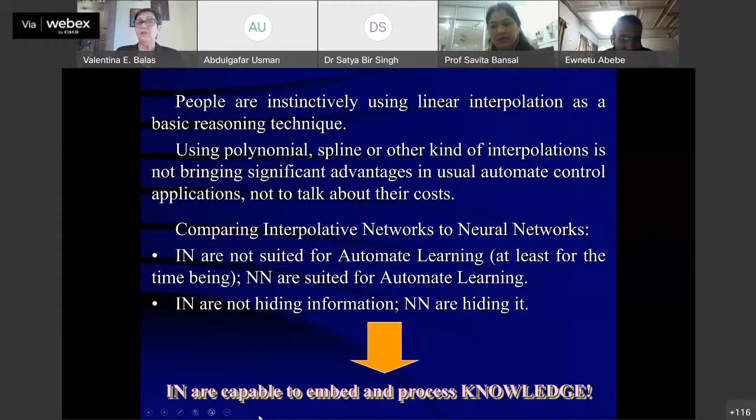It is well known that people instinctively use linear interpolation as a basic reasoning technique. And comparing interpolative networks to neural networks, we can see that interpolative networks are not suited for automatic learning, neural networks are suited for automatic learning, and interpolative networks are capable of embedding and processing knowledge. This is very important for us. And the starting point for the fuzzy interpolative systems used in our control work was interpolative networks from Sir Isaac Newton as universal approximators, but the roots are also in fuzzy logic developed by Professor Zadeh.

It's about knowledge linguistic representation. Our approach, fuzzy interpolative methodology, shows us a fuzzy interpolative controller, that is a controller that can be equated with an interpolative network that I have introduced before. So there are fuzzy control rules that have each one a corresponding interpolation node, and very easy, the immediate result is that it can be implemented by lookup tables or other similar tools, even in analog integrated circuits.

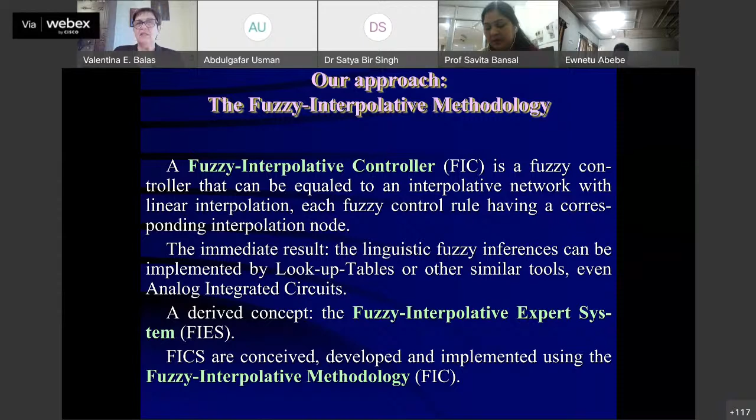A derived concept is the fuzzy interpolative expert system. And in few words, I will develop this fuzzy interpolative methodology. We used 3 different sources in developing this methodology. First, it was the papers of Zadeh, Sugeno, Bauer, and you can see here the Sugeno fuzzy controllers. They can approximate finite n-dimensional functions with arbitrary precision. You can see the red line is an approximation for the black line.

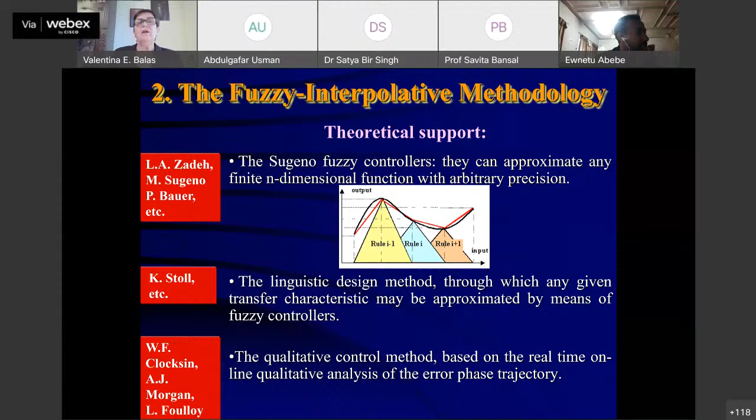Then papers of Stoll with linguistic design methods, and last, Clocksin, Morgan, and Laurent Foulloy. It's about qualitative control based on the real-time online qualitative analysis of the error phase trajectory. With Professor Laurent Foulloy, I spent 2 months in France during my PhD documentation, with their team in Annecy. They are working with such qualitative control methods.

Also, the main model is very easy to understand, starting from a controller with an immediate linear interpolative equivalent. We are using fuzzy triangular partitions, prod-sum inference, and center of gravity defuzzification.

Here is Professor Sugeno, who visited my country every 2 years for the conferences that I'm organizing here, Soft Computing and Applications, and he is the honorary chair of my conferences. At the same time, Professor Zadeh visited Romania 5 times at my invitation, again for my conferences or on other occasions.

In closed-loop control applications, fuzzy interpolative controllers match this fundamental time analysis tool, the phase trajectory of the error, that is associated with qualitative analysis. Here it's very easy to understand the methodology. First, we are using the phase trajectory of the error. You can see the error and the derivative of the error, and this trajectory that is going to 0. This is our dream, for people working in automation: the error to be 0.

Then we are speaking about McVicar-Whelan tables and the interpolative networks implemented by lookup tables. Very easy. Anyway, to understand very well all that is here, this methodology, classical automatics must be well known. And after that, the information is so much concentrated here, so it's not so easy to understand at first sight.

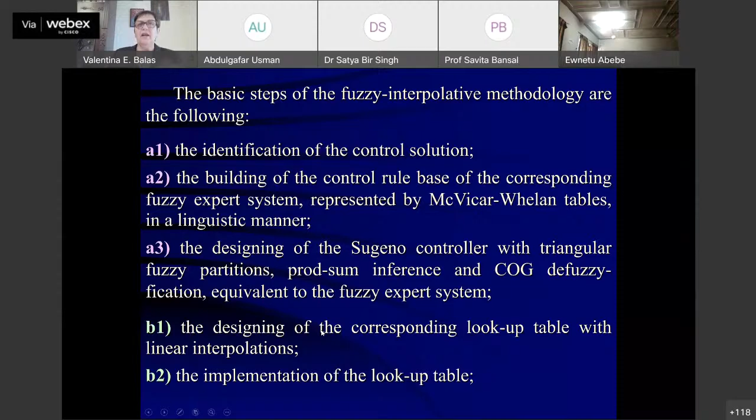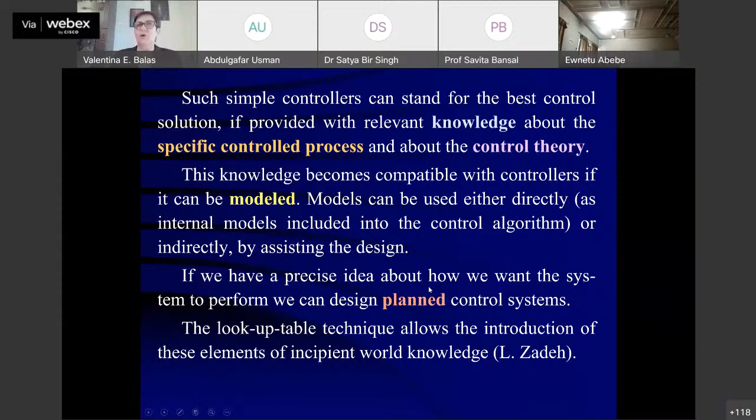And also, such controllers stand for the best control solution only if we provide them with relevant knowledge about the specific control process. This kind of knowledge Professor Zadeh named world knowledge. And we can introduce it in these lookup tables.

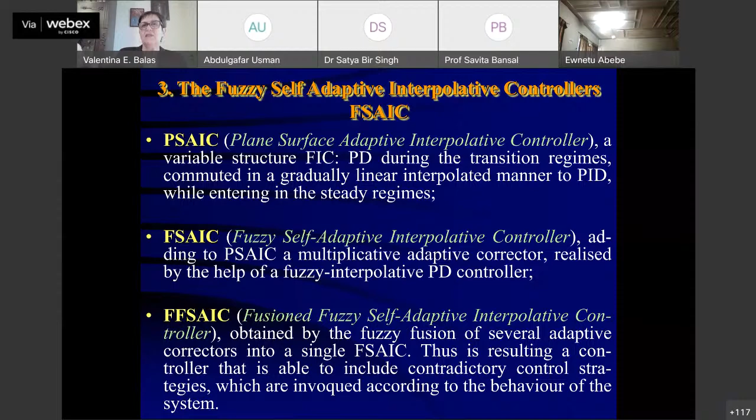During the World Conference on Soft Computing in 2018, we discussed a lot with Professor Jerry Mendel. You know that he introduced fuzzy type 2 systems and so on. And it was a very nice discussion with him.

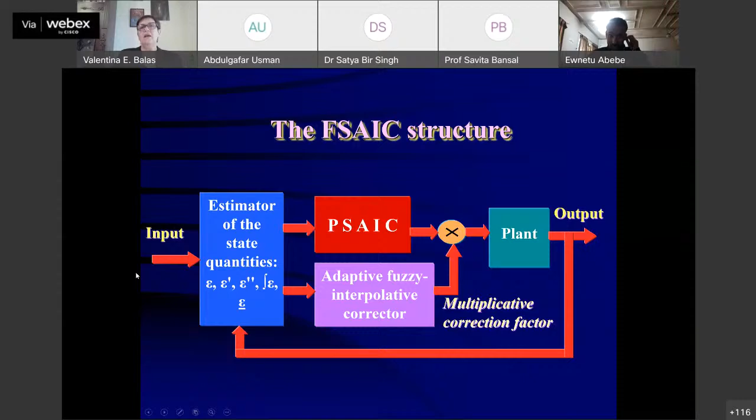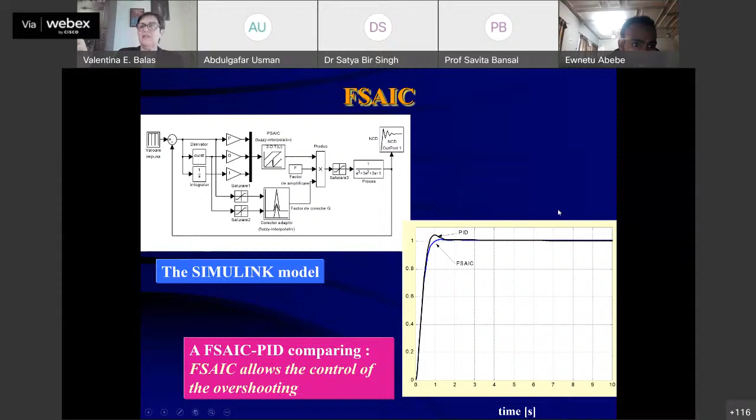Then the next member of the family is organized around the first one, putting in these blocks. And here is a simulation just to show that this controller works better than a PID. You can see the step response here, the blue line that goes very fast to the value that we introduced, 1. So there is also some development of the control rule base to organize the corrector and so on.

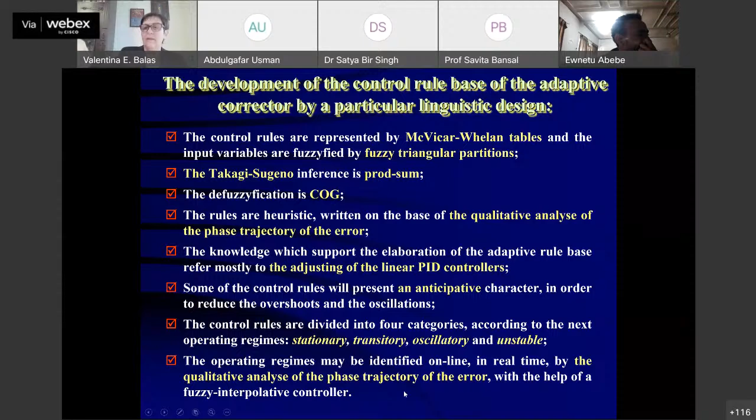You can see many things here, but very important are these different categories, 4 categories or operating regimes: stationary, transitory, oscillatory, and unstable. And we are working, as I told you, using the qualitative analysis of the phase trajectory of the error. These are the 4 regimes, and what is happening with the gain in each regime: G1 transitory, G2 steady, G3 oscillating, and G4 unstable.

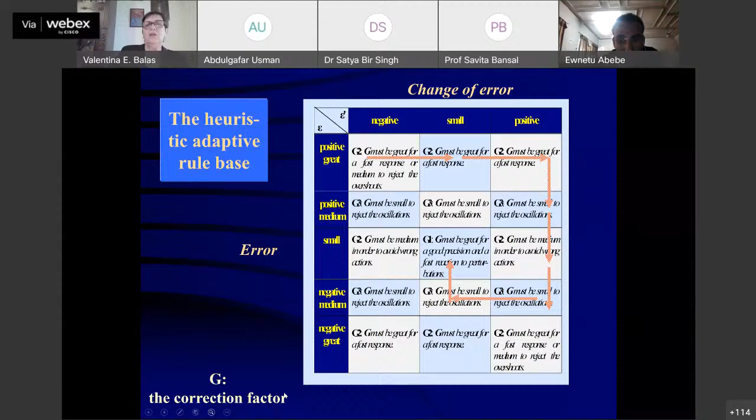You can see this operating regime in this figure, G2, G3 oscillating, G4 unstable, looking in the phase plane of the error and the derivative of the error. Here is the heuristic adaptive rule base, organized again in this table, the error and the change of the error. And we are looking at the correction factor.

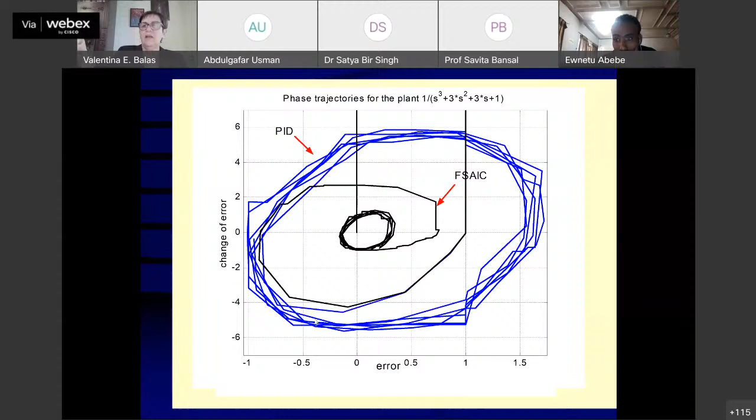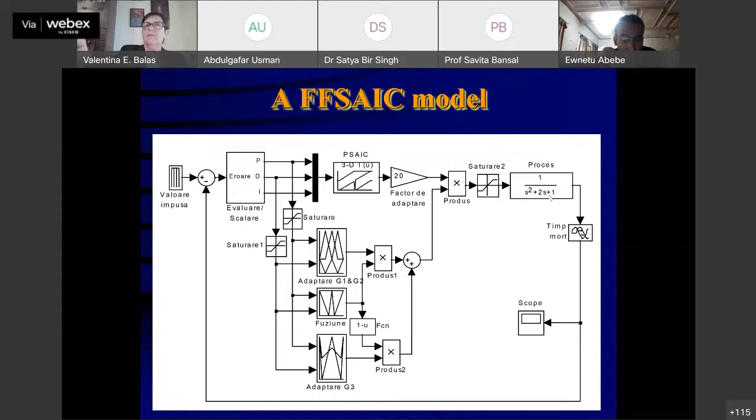So there are some benchmark studies that confirm this remarkable potential of fuzzy self-adaptive interpolative controllers. And it's important that we are using them first of all in applications, because me and my husband, the principal person in this team, together with our colleagues and PhD students, were working for 9 years in an institute for research in railway coaches. It's the biggest factory for railway coaches in Southeast, in our city.

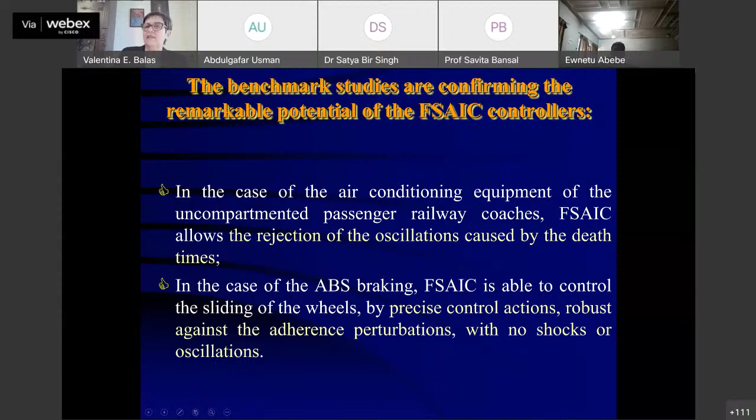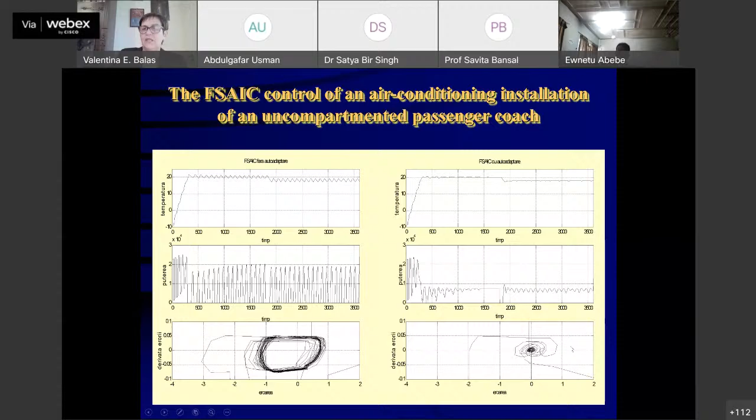And the first applications were this air conditioning equipment using this controller and an ABS braking. So we observed that they were working very, very well for this kind of highly nonlinear systems. This is about the air conditioning installation for an uncompartmented passenger coach using this fuzzy self-adaptive interpolative controller without adaptation, and with adaptation you can see the oscillation is very, very small. It's an ABS controller. I will come back to this.

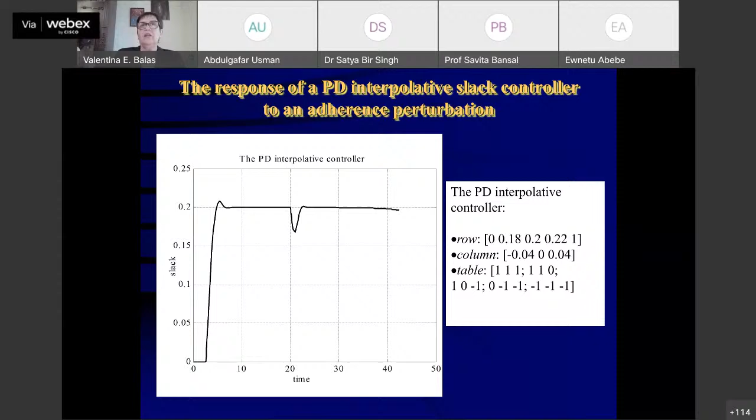And again, some simulations by introduction of adherence perturbation, different oscillations, and some advantages of such controllers. It's very easy and fast to develop them. And as I told, after developing them as lookup tables, implementation is very easy using FPGA. They have good performance and cope with unknown processes, and also they are efficient to implement in any software and hardware technologies.

Here also I want to arrive to that side where I am discussing optimization. So another interesting chapter that we studied in our last years is related to what is happening when we switch from a controller to another one. More precisely, what is happening when we switch from manual to automatic pilot, let's say. So we know that we are dealing with digital systems, and the fundamental advantages of such digital systems are very well known, and still they have limitations. Why are there limitations? Because of an oscillatory behavior caused by the discrete action of an ABS controller.

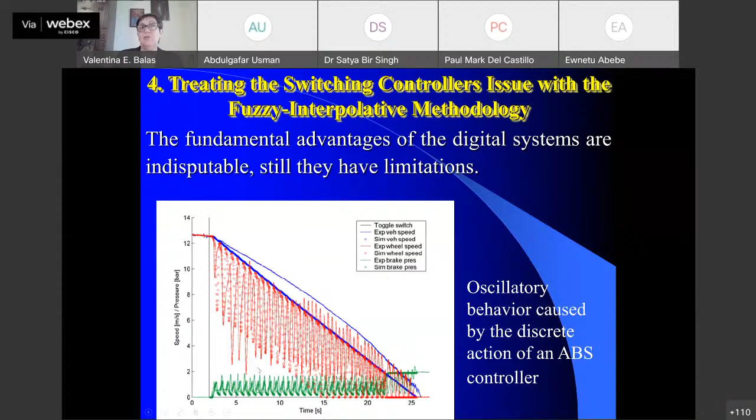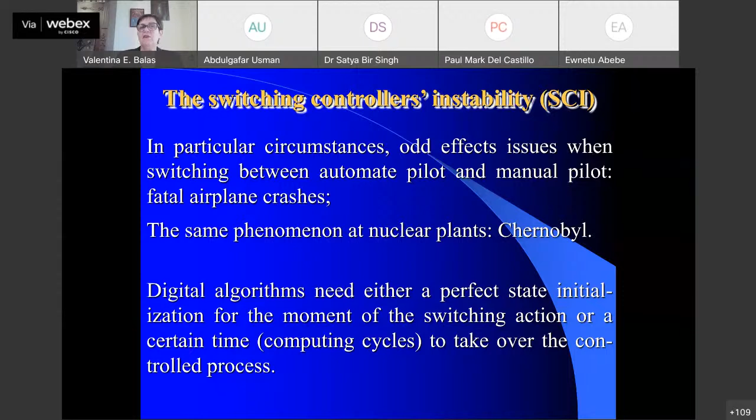Switching controllers instability is an important chapter here to discuss. We need only to think of the phenomenon in nuclear plants, Chernobyl. There this phenomenon was happening. They tried to switch from automatic to manual mode, and this big error happened there and a big accident. The same things are happening also for airplanes when they want to switch from automatic pilot to manual pilot. Why? Because algorithms need either a perfect state initialization of the switching action or a certain number of computing cycles to take over the control process. So there are some processes that are happening there.

Some detailed studies of switching phenomena were reported, but mostly for linear systems. Switching systems can be potentially destabilized by an unlucky choice of the switching moment. For Hurwitz stable closed-loop systems, this stands even for identical switched systems. Even if they are identical, you will see in some simulations what is happening there. The concrete implementation of the computer that performs the process control can produce the same effect: integration method and tuning, sampling rate, and so on.

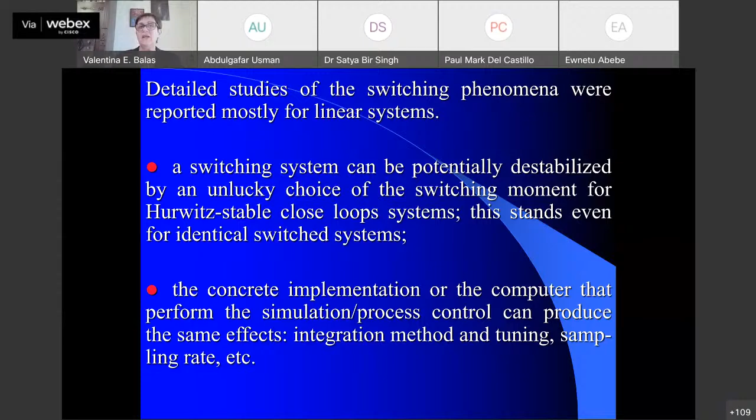So the frequency analysis cannot be used because transfer functions are defined for null initial conditions. So for nonlinear systems, the frequency analysis has few chances to produce results because of the lack of a unified theory. A better solution is the time analysis. So we can use again this phase trajectory that can fully support the design of switching controllers for linear systems. And we aim to move these techniques toward nonlinear systems, replacing the precise control of the phase trajectory that can be achieved in linear systems by qualitative analysis of the phase trajectory, as I told you, related to the work of Professor Laurent Foulloy. The method can be easily implemented again by fuzzy interpolative controllers.

A benchmark study: we have a PI and a PD controller, and we want to switch controllers for a DC drive. There are some real data here, and we have them for the PI controller and for the PD controller.

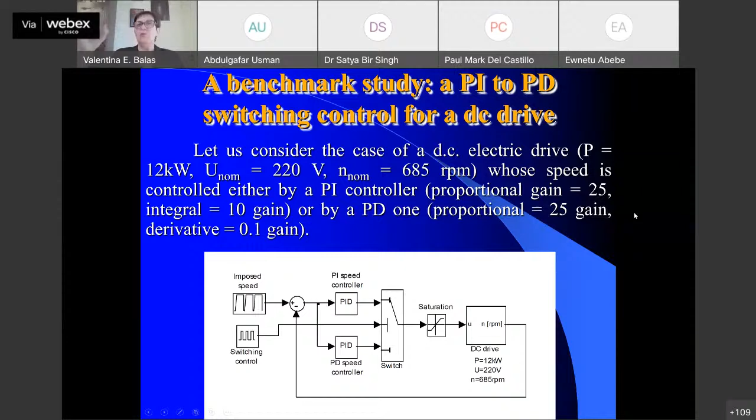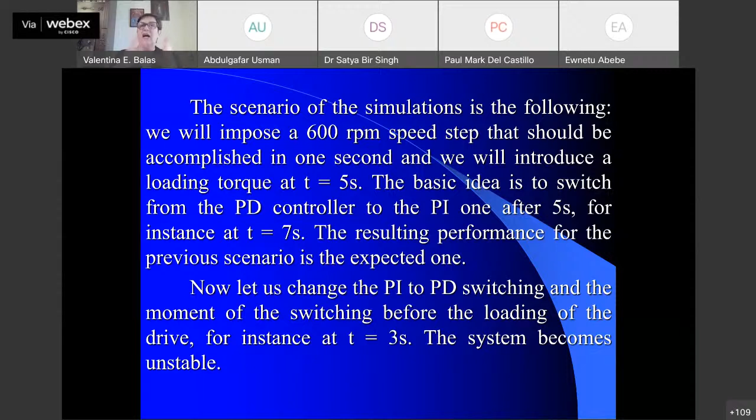In this figure, you can see it's written PID for both, but one is PI, one is PD, and we want to switch from one to the other. We have saturation and here the DC drive, and we will take a look at what is happening when we do this switching action.

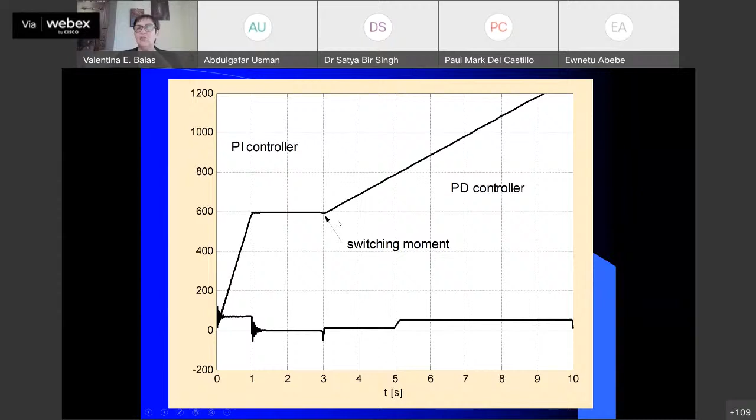We introduce different times for when the switching moment will arrive to see what happens. From some real data, we show what happens with the PI controller, which is keeping 600 rotations per minute. At the switching moment, switching from PI to PD, we can see the value going up instead of maintaining it.

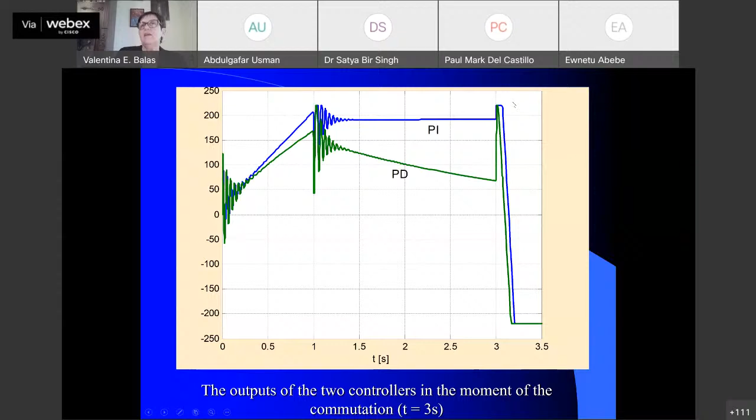So it's an instability just when you switch from one controller to another. This slope can be negative or positive, going up or going down. If we try to switch at 5 seconds, the slope is going down. At 4 seconds, the slope is going up. When we switch from one to the other, the output of the two controllers at the moment of commutation, at 3 seconds, we can see what is happening.

So there are some empirical observations: controller instability may evolve in both senses, positive and negative. It can appear as well in the case of same-type controllers - we can have PD and the same thing happens. It finally produces saturation of the controller, but its causes are not necessarily linked to saturation. It essentially depends on the simulation's parameters, integration method, error, and even the simulation hardware.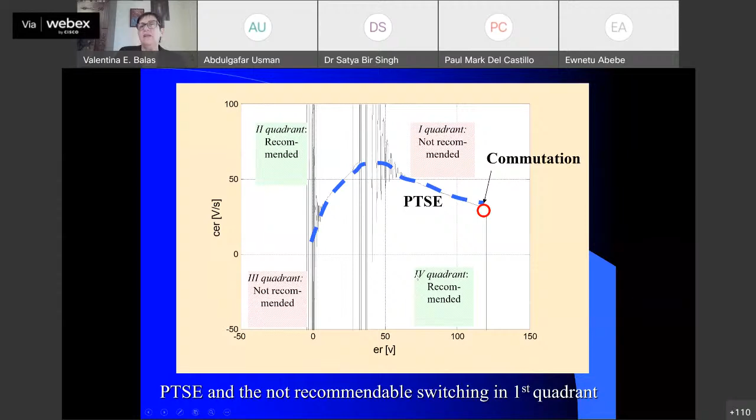What we can observe is that this point of commutation is not recommendable - switching in the first quadrant is not recommended. Also in the third quadrant, not recommended. It's recommended in the second and fourth quadrant. If we keep in mind this criterion for where to switch, we can choose the switching moment, and the risk of producing instability decreases massively. So in fact we never see such a case, but this is not demonstrated.

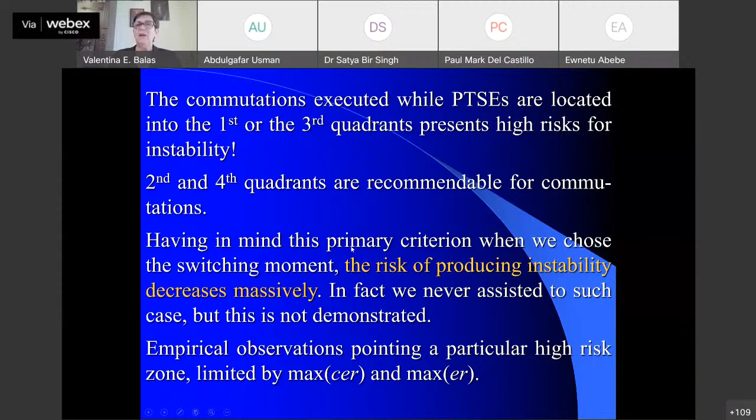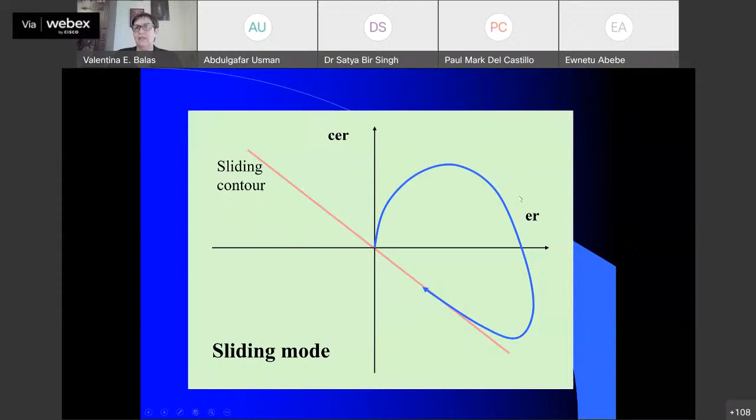So from empirical observation, we observe a particular high-risk zone. Looking at this figure, we are inspired by sliding mode control, and again, sliding contour happens in the second and fourth quadrant, not in the third and first one.

Some applications, related to this airplane, the Jet 25. We have here the model, the pitch angle to elevator transfer function, and it's a third order system. Again, we have two controllers - we want to switch from one to the other and see how things go.

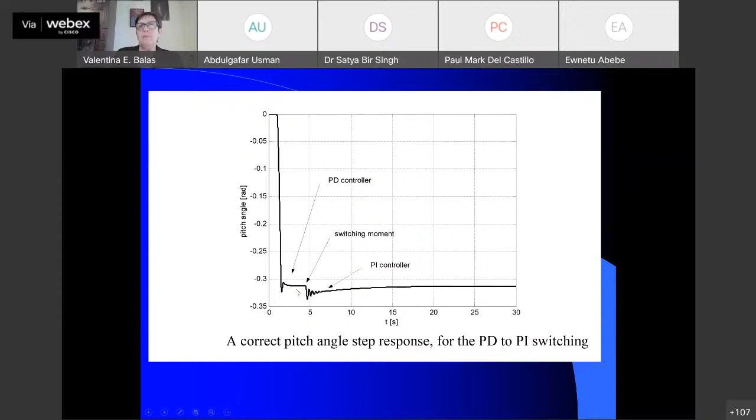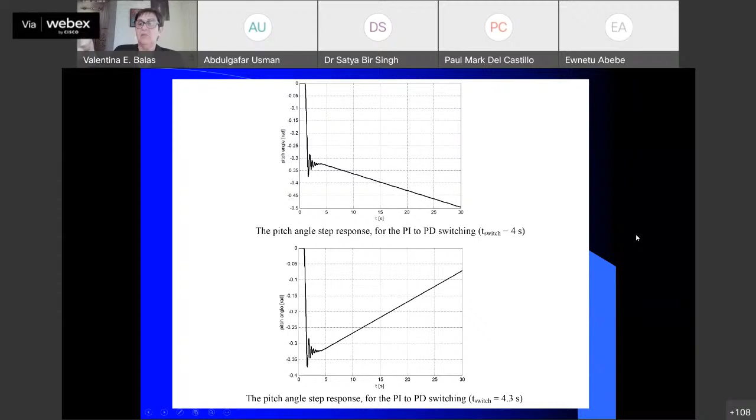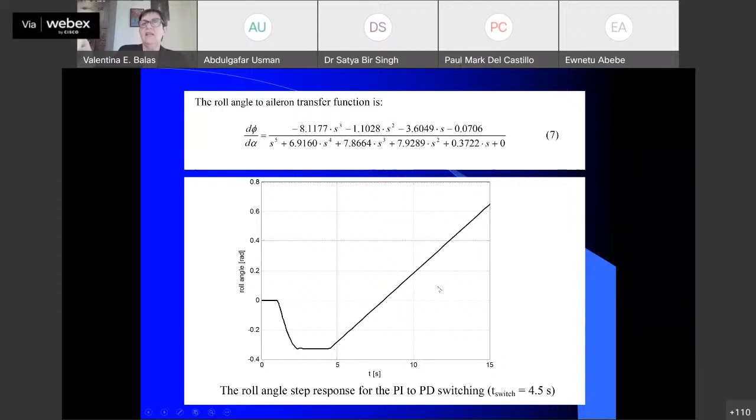Again here we have an instability. For the other airplane, we have only a few oscillations, you can see here. So the results are working better.

Some recommendations - what can we do in this case? Replacing the digital systems with analog circuitry is an extreme measure and causes interface complications. A better version of this idea is to remove the feature that can cause instability for switching control systems.

I will go further - the Nyquist-Shannon sampling theorem, we are using this again. Why? Because it's perfect for information transmission if we know the channel bandwidth. If not, one measures it in 3 minutes, largely used in automated control too. Still, in case of a complicated plant, highly nonlinear, like an airplane, who really can know the bandwidth?

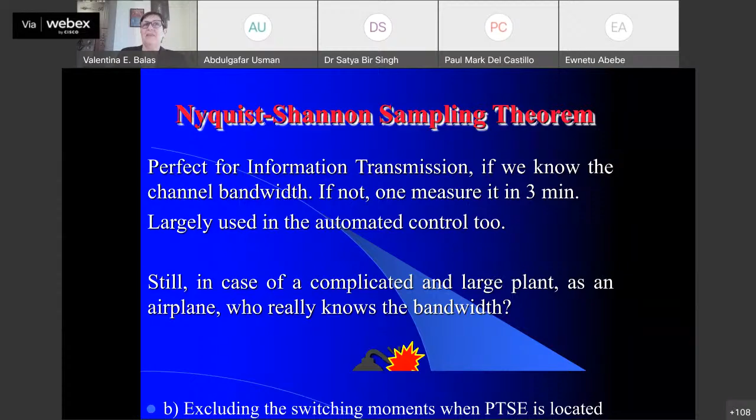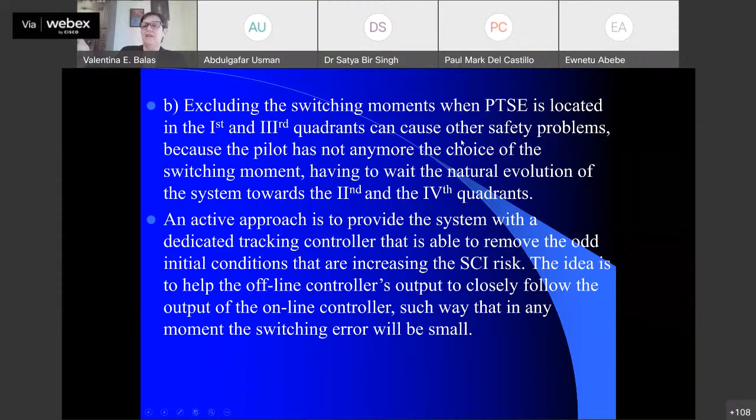Here, B is the idea of excluding the switching moment when located in the first and third quadrant, and here is a solution for this problem. We have the active controller, the unconnected controller that wants to switch after some time, and the process. What we are doing is introducing for the second controller the same conditions, and we check when the output is the same - that's exactly the moment to switch.

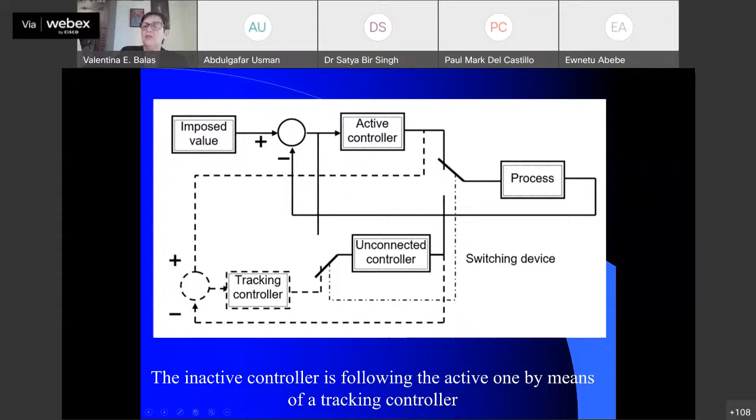Now some applications. I will introduce you to railway coach air conditioning.

This is related to intelligent transportation, other applications for ABS braking for railway coach.

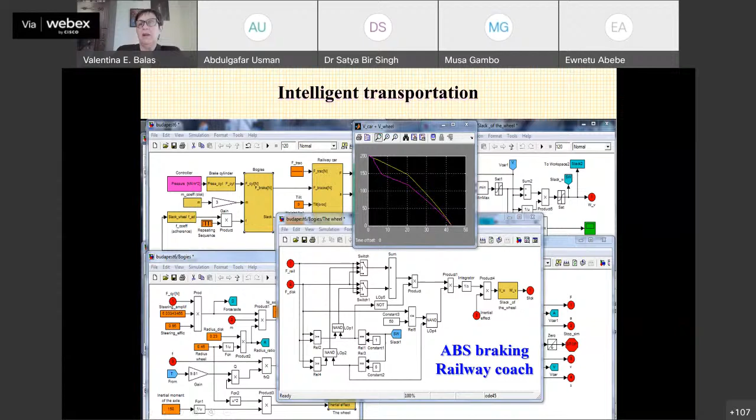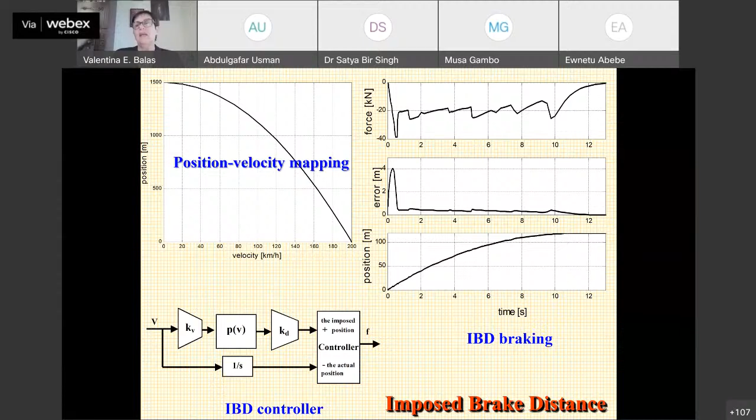Now here is what I want to introduce you to: the optimization of the distance between cars. We have a lot of systems like the adaptive cruise control and other systems that are very much introduced nowadays, because we are looking for the autonomous car, as you know very well.

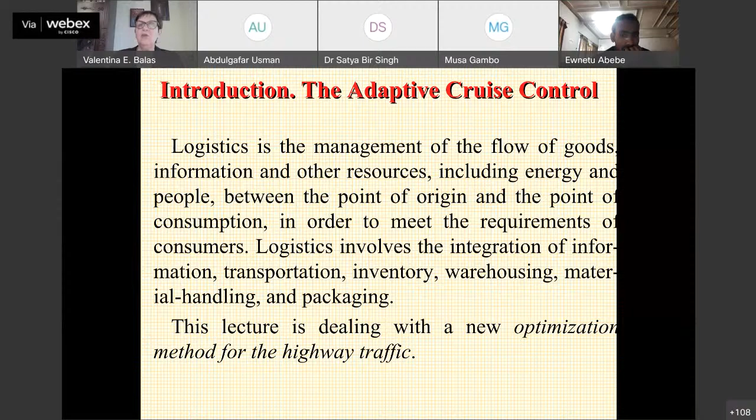In this part of the lecture, I will present a new optimization method for highway traffic.

As I told you, for intelligent transportation systems there are many systems like advanced driver assistance systems, when designed with a safe human-machine interface, and it should increase car safety and road safety.

Again, adaptive cruise control, intelligent cruise control, everything just to avoid collision in such a system organized not by two cars, but many cars.

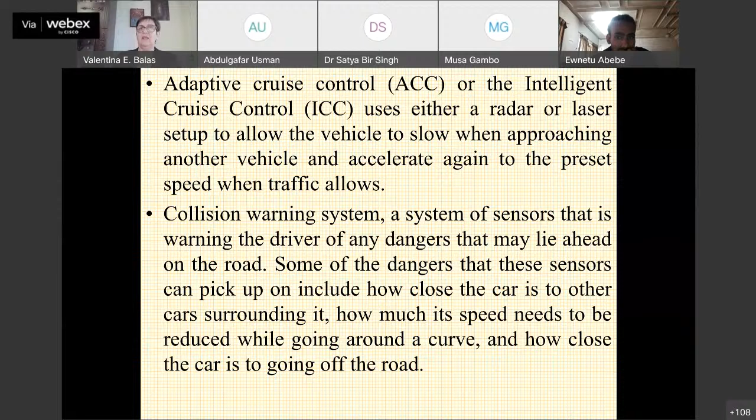Some of the dangers that sensors introduced in such systems can pick up include how close the car is to other cars surrounding it, like here in these following cars on the highway.

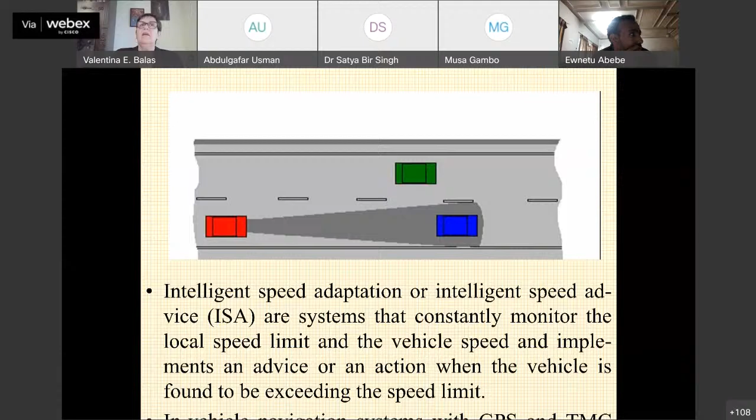Intelligent speed adaptation or intelligent speed advice are systems that constantly monitor the local speed limit and the vehicle speed. We also have in-vehicle navigation systems like GPS or traffic message channel.

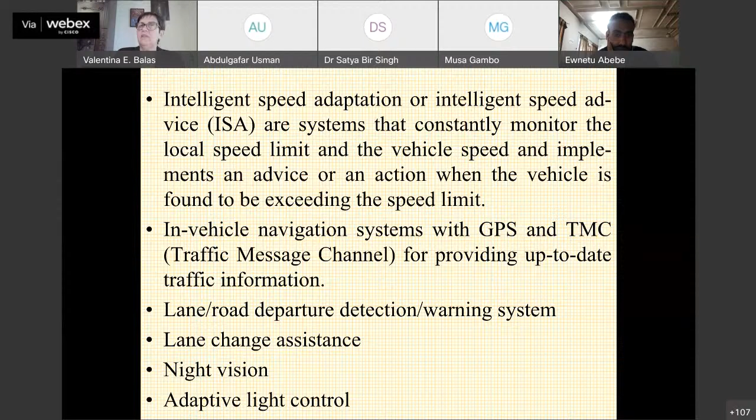We have lane or road departure detection, lane change assistance, night vision, and so on. Other facilities we are studying, as you know very well, include pedestrian protection, automatic parking, traffic sign recognition, and so on.

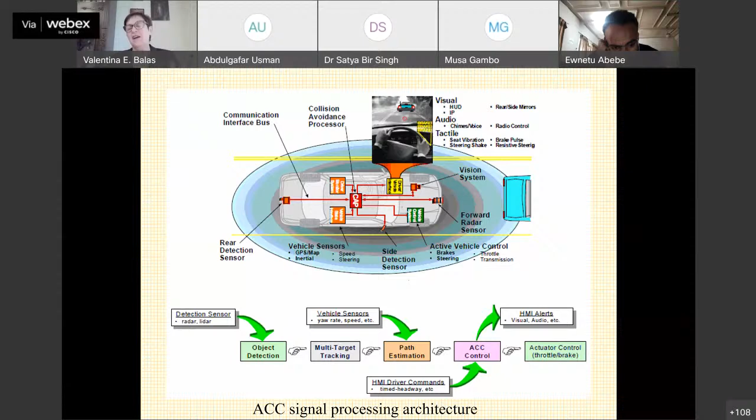Even Professor Zadeh said that the most complicated task is to have a car park automatically. Nowadays, you can commute on autopilot and you can have parking done automatically.

So automated driving is likely to produce, in its turn, safety risks from driver distraction and reduced situation awareness, causing in time a reduction of driving skill.

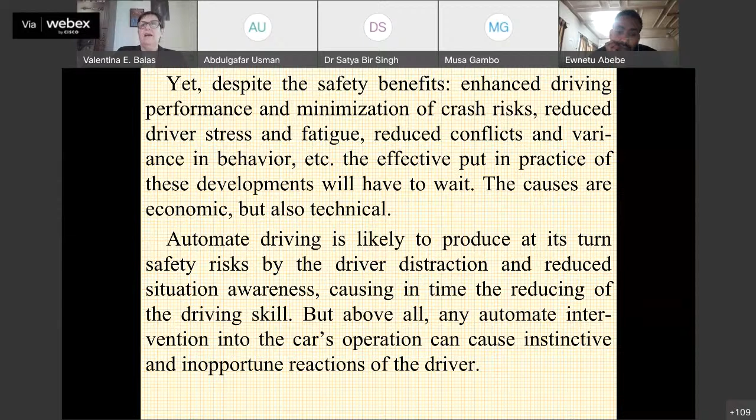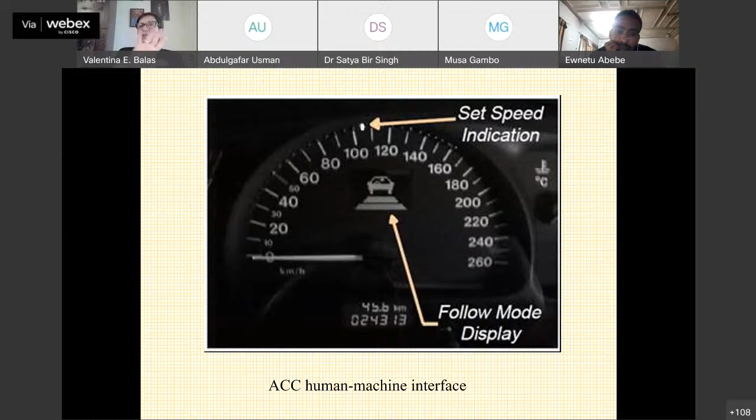There are different facilities, human-machine interfaces. You can see there is a lot of information on the screen for the cars.

Some traffic indicators now. In the car-following algorithms, there are some indicators introduced just to measure the characteristics of the traffic flow: time to collision, time to accident, post-encroachment deceleration to safety times, and so on.

But this is the criterion that we are working on, and we observe that it's very useful for many students and for many people working in industry: the time to collision criterion.

It's so easy. I started the presentation with that sentence, that we do not need to complicate things. Things are very simple. So this formula, time to collision, means the time that it takes before car 2 collides with car 1, assuming unchanged speed of both vehicles.

And that formula is there. Negative time to collision implies that car 1 drives faster, and there is no danger, but positive time to collision expresses an unsafe approach, and the situation requires doing something.

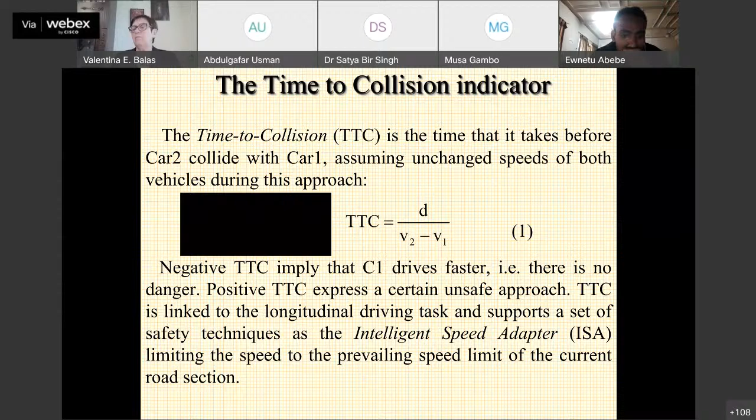But because in that formula, if the denominator is 0 when the speeds are equal, we would obtain plus or minus infinite, time to collision is replaced with inverse time to collision.

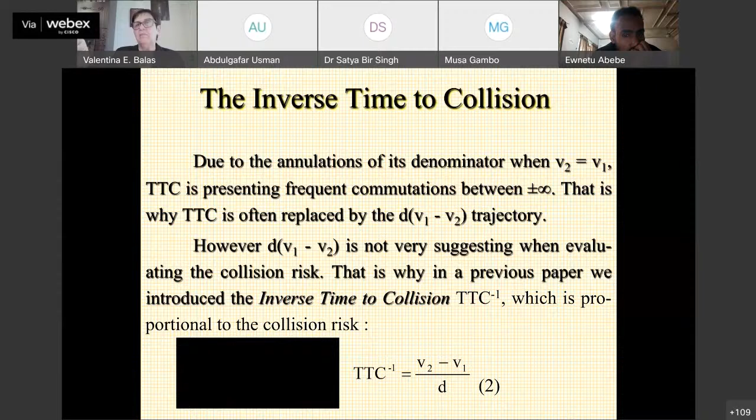And you can see the same formula, but inverse. Some simulation scenarios are here.

From one draw to another, I lost some data here, but you can see only the relation between speeds.

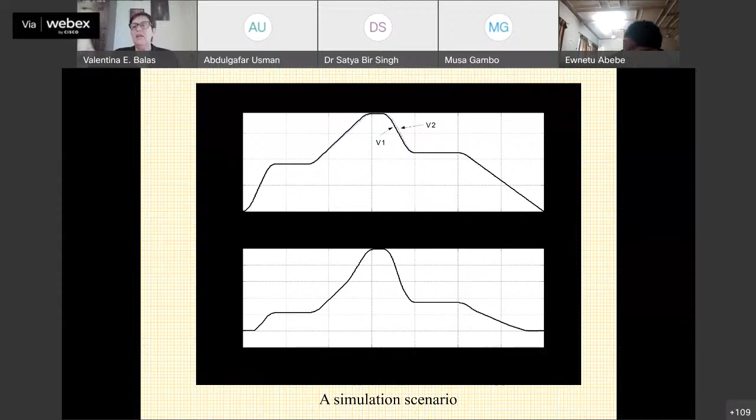We are using such diagrams, inverse time to collision trajectory, and the corresponding fuzzy partition assisting the driver.

So using a fuzzy set that we introduce here, we need some region, not certain data. In this blue region, no risk at all. In this green region, we preserve the trend with easy braking, and in this region it becomes compulsory.

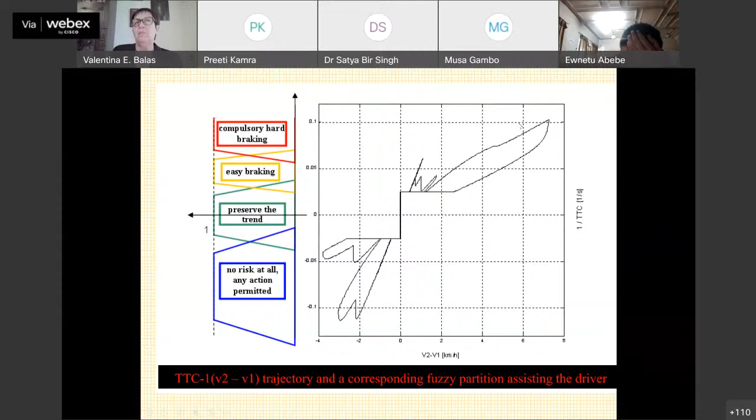Using such a criterion, we can optimize the distance between cars.

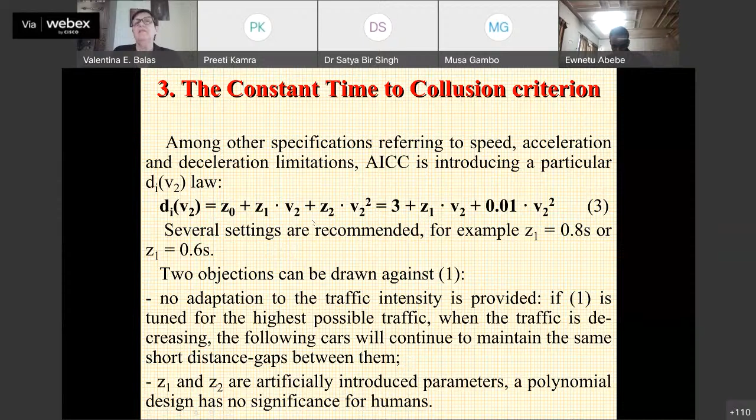In the literature, we discovered this law in Formula 3, which is very strange because there are some coefficients that have no meaning for humans. So we compare our constant time to collision criterion with this formula.

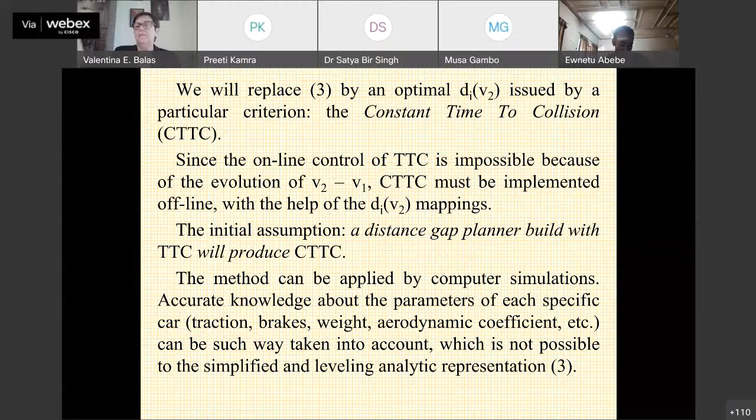You will see, after using our criterion, if the speed is 200 kilometers per hour and the time to collision is 4 seconds, we can determine the distance between cars. The distance is bigger, and so on.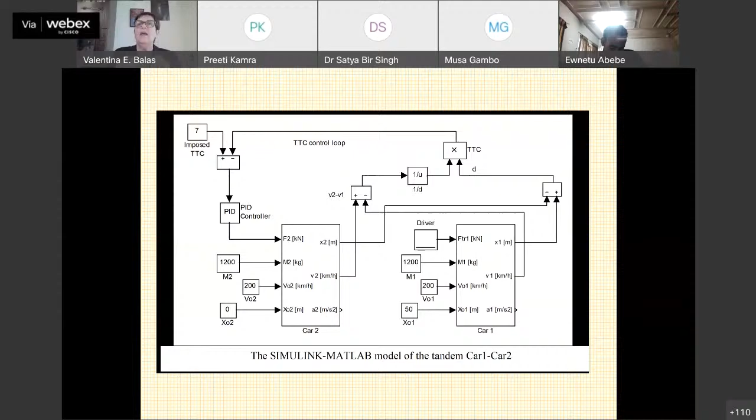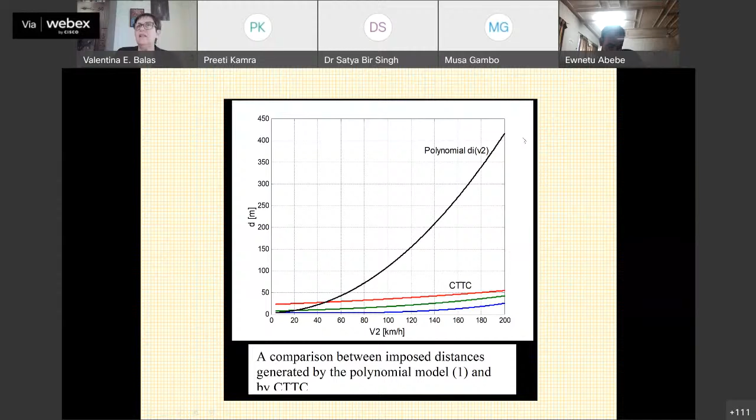We made simulations with 2 cars going in tandem to see how they can preserve the distance between them and maintain safe driving. Here is the polynomial with no meaning, hard to interpret. But applying this criterion gives a constant collision risk for each vehicle and the possibility to control traffic flow on extended road sections.

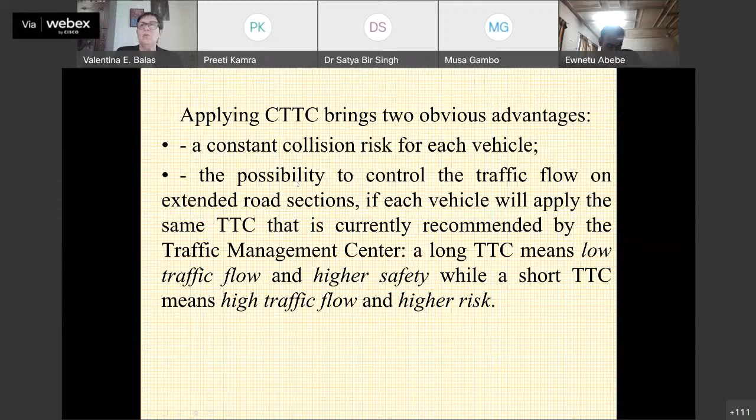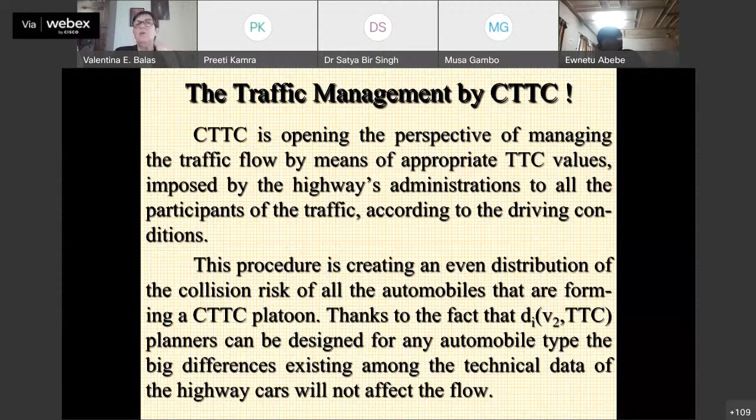Again, we are using a fuzzy interpolative distance controller. This is the control rule of the distance controller, introduced very easily. This is the PD fuzzy interpolative rules control, and it's interesting that we can use it to maintain distance between cars in different simulations, so we can have traffic management using this criteria.

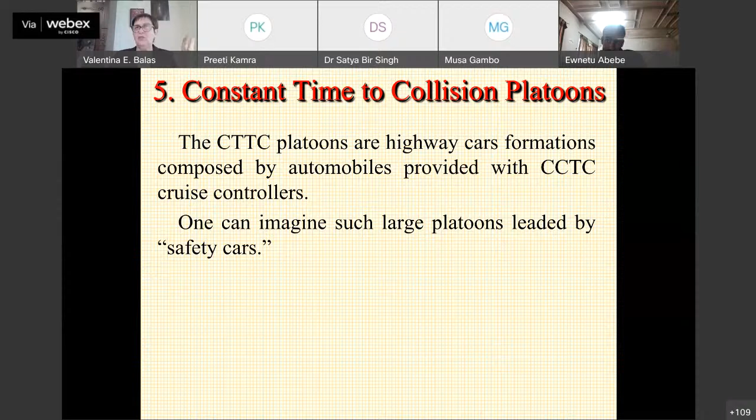It's also interesting to develop the constant time to collision platoon idea. Now we will have a platoon, not only 2 cars. We put here 5 cars, and each one is following the other one.

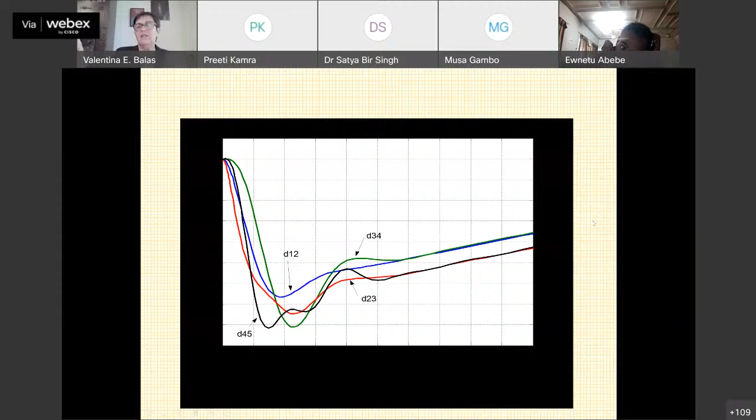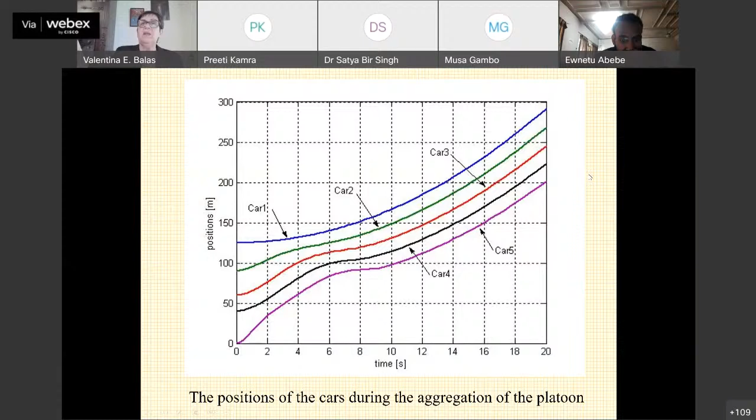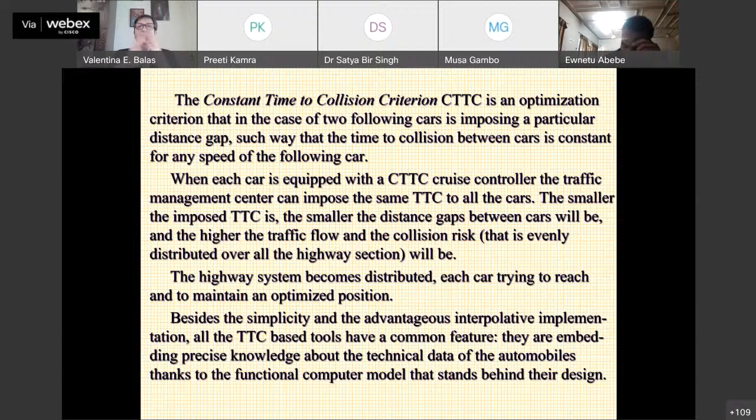How are they organizing in a platoon? In a few seconds, they are organizing in a platoon. First, their speed is varying. Here you can see 5 cars going in a platoon and maintaining the distance between them. This criteria is an optimization criterion that, in the case of 2 following cars, imposes a distance between them.

I think I will stop here. I will also pass through other applications: greenhouse intelligent control. We have also optimization here, how to maintain the temperature inside using the same techniques. What happens is we are decreasing the consumed energy.

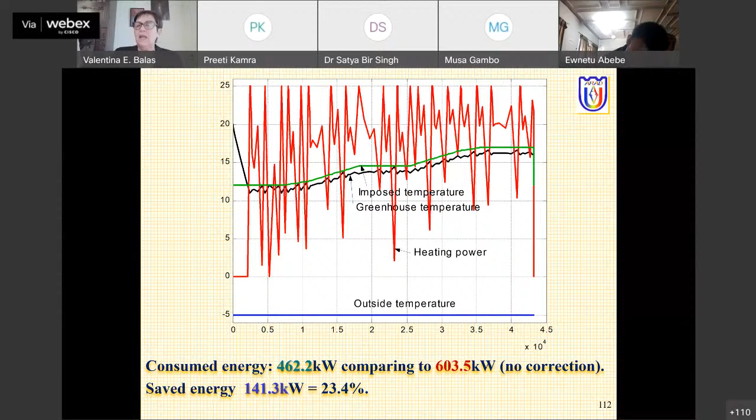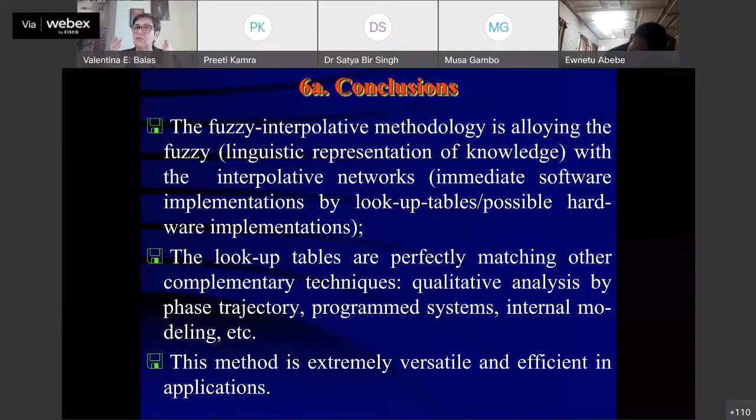Also, I forgot to tell you that in this constant time to collision criterion, we can obtain economy in fuel gas - the Renault company used this criterion and obtained 25% fuel gas economy, with different oscillations and conclusions. So this family of fuzzy interpolative methods can help us in optimizing our systems, controlling and helping to optimize their function. Thank you very much for your attention.